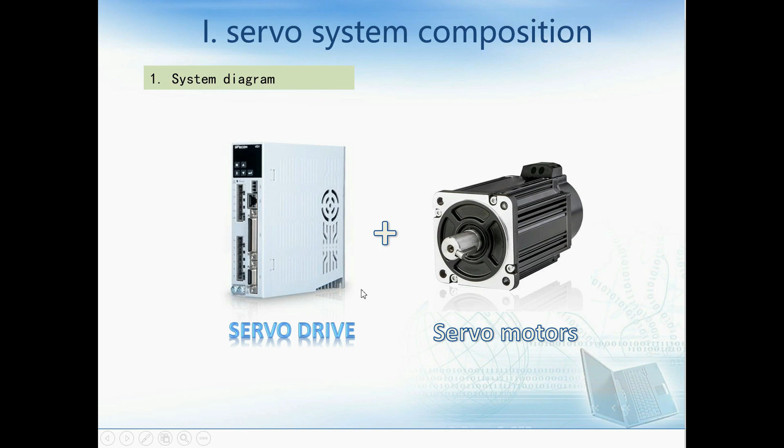Wecon Servo drive is composed of 2 parts, namely the servo drive and the servo motors. Here we talk some history about servo. The word servo derived from the ancient Greek word for slave. It means that the servo can move at a specified speed or distance.

Before the signal arrives, the rotor is stationary. The rotor rotates as soon as the signal arrives, and when the signal disappears, the rotor can stop on its own in time. Because of its servo performance, hence the name. At present, servo has become high precision, high response speed, high performance synergy.

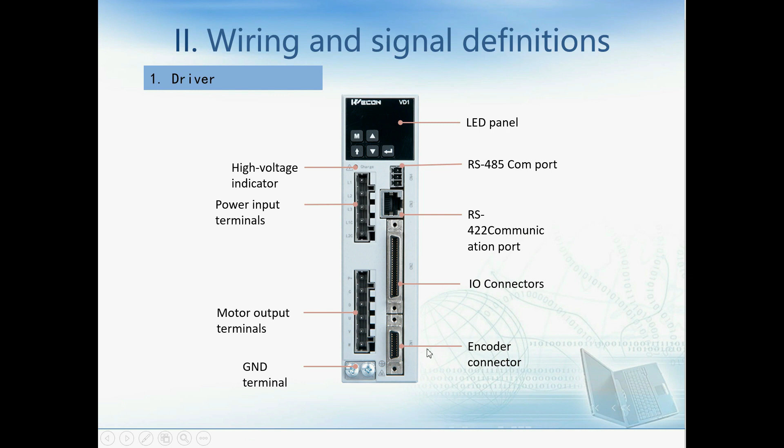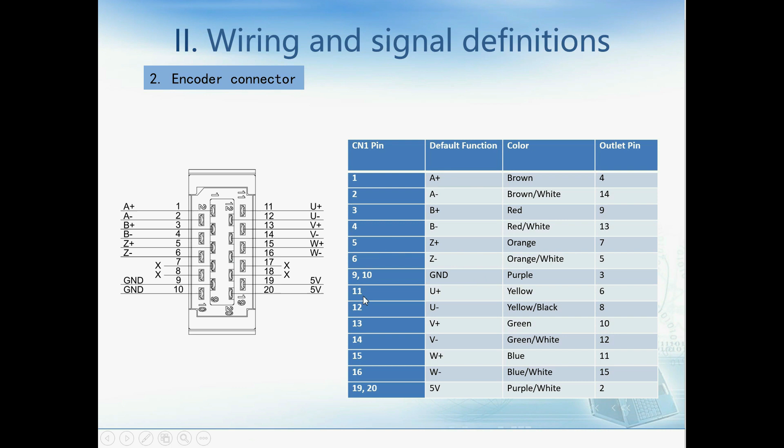And this is the I/O connector, and this one is the encoder connector. Here's the encoder connector. Because it's a ready-made cable, we don't need to solder the pins by ourselves. And this is the I/O connector. Here we can see AI1 and AI2. AI1 and AI2 are for the speed reference and torque reference. Both signals range from -10 volts to 10 volts.

And then here is the digital output port. This is the sign and the pulse signal port. Generally, these 2 signals come from the PLC, so we can use the PLC to control the direction and the speed of the servo motor. And here's the digital input.

And this is the PAO, PBO, PCO. This is the so-called pulse division output. For example, when we input the signal to the servo drive, we can get the feedback pulse from PAO, PBO, and PCO. So that's the function of the PAO, PBO, and PCO.

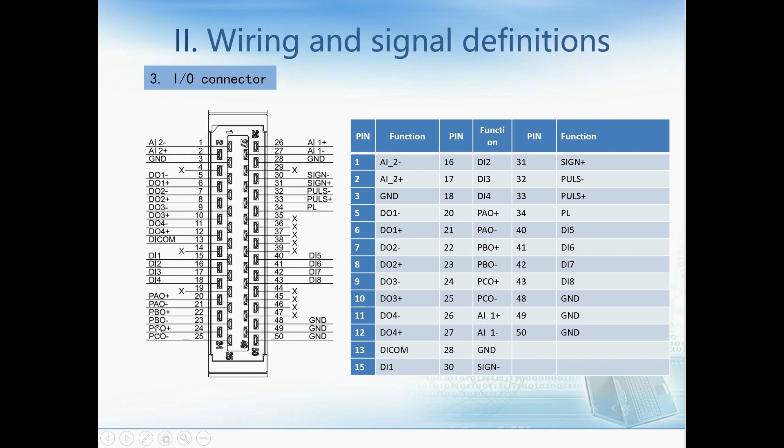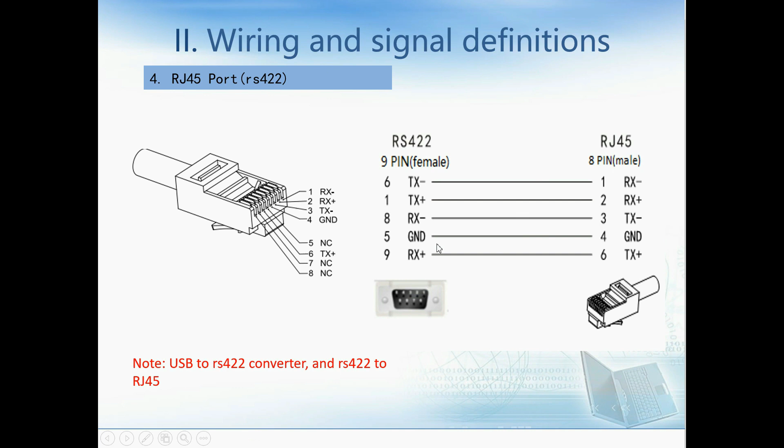And this is the RJ45 port. As I just told you, it's RS422. Because most PCs don't have a COM port, we need a USB to RS422 converter, and then we need to connect according to this diagram, and then we can debug the servo drive with our PC. This is the RS485 COM port for Modbus RTU protocol.

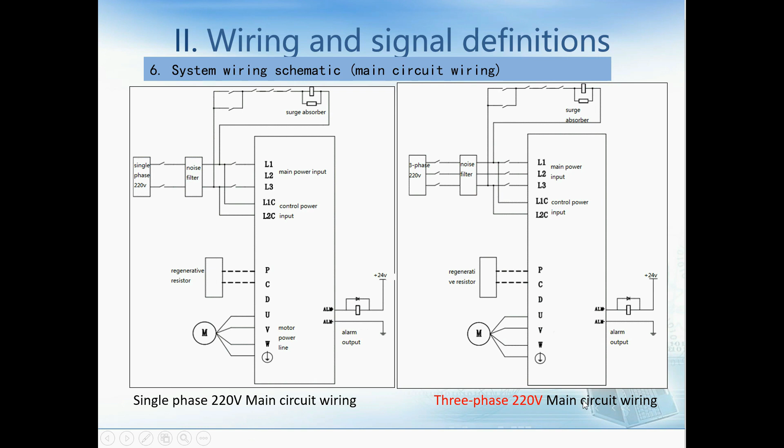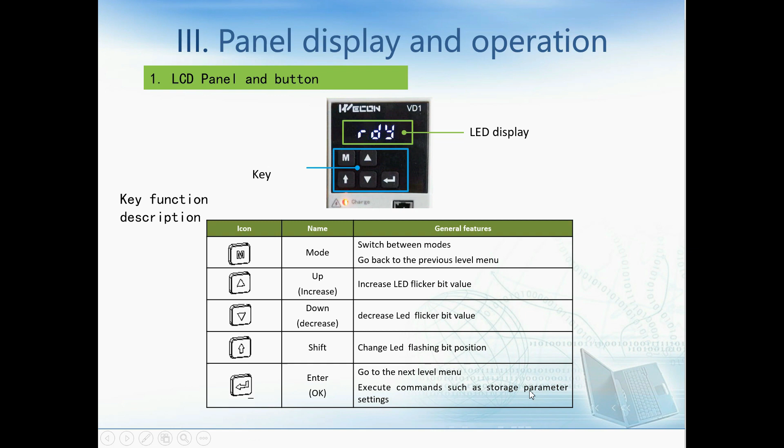from the host controller. The fourth one is run. Run means the servo drive is in running state. And the last one is jog. It means the servo drive is in jog running state.

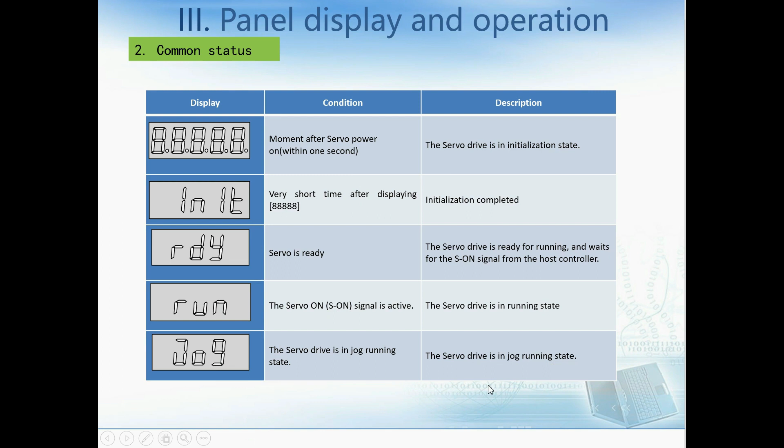And here are two alarm displays. The first one is A-84. It means we need to restart the drive to make modified parameters take effect. And error 34 means the motor is overloaded.

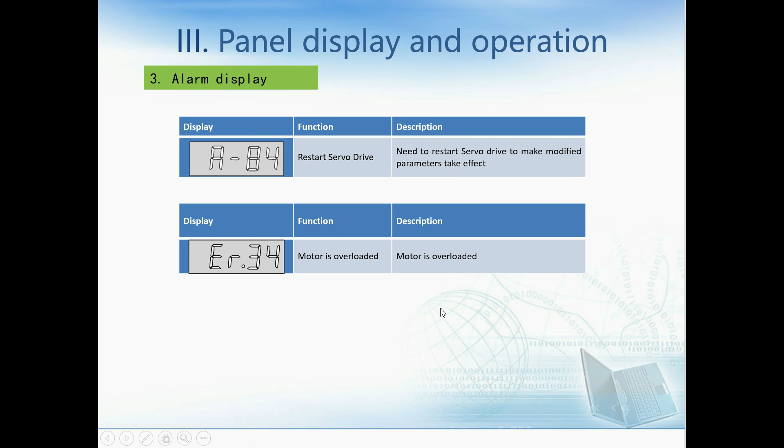And here are the 4 monitoring values. Here you can see 2000 and minus 2000. It means the actual running speed of the servo motor. Minus means the reverse direction. And this one means the bus voltage. It can display the voltage value between driver P plus and minus.

And this one represents the level status corresponding to the 8 digital input terminals. The upper part of the digit means it's at a high level, and the lower half indicator means it's at a low level. This means DI1, this is DI2, DI3, and so on.

U0-19 means output signal state. Just like the above parameter, the upper part of the digital tube indicates a high level, and the lower half indicates a low level. This one means digital output 1, this one digital output 2, and so on.

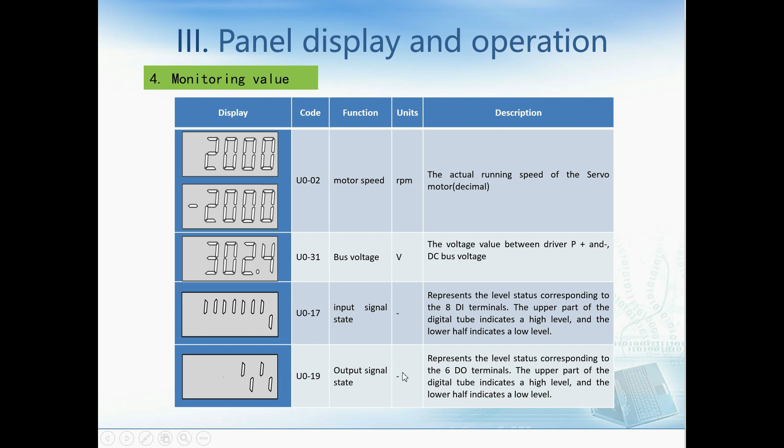Here I will show you how to control it from the front panel. First we click the M button, and then we can see P0.1. It means parameter 1. And we can use the up key to switch to parameter 2, or the down button to switch from parameter 2 to parameter 1.

If we click the enter key again, we can enter the next menu to modify the value of P1. We use the up and down buttons to change the value, and then we use the enter key to modify the parameter.

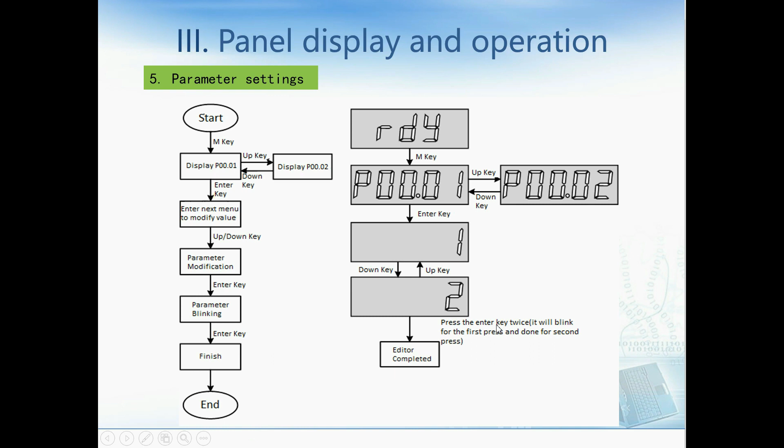Here's one thing we need to pay attention to. We press the enter key twice; it will blink the first time and show done the second time. It means we need to press the enter key 2 times, and then we can change the parameter successfully.

Here's another example. If we want to use the jog function, first we need to access the P10.1 parameter and press the enter key to display the jog initial speed. We use the up and down keys to change the jog speed, press the enter key 2 times, and then we change the parameter. Finally, we can use the up and down keys to execute the jog operation.

And here's another function we often use, so-called restore factory settings. First, we need to access the P10.2 parameter. We press enter and use the up key to change the value to 1, and then press enter again. Here we need to long press the enter key for 3 seconds. It will display DONE, meaning we have restored factory settings successfully.

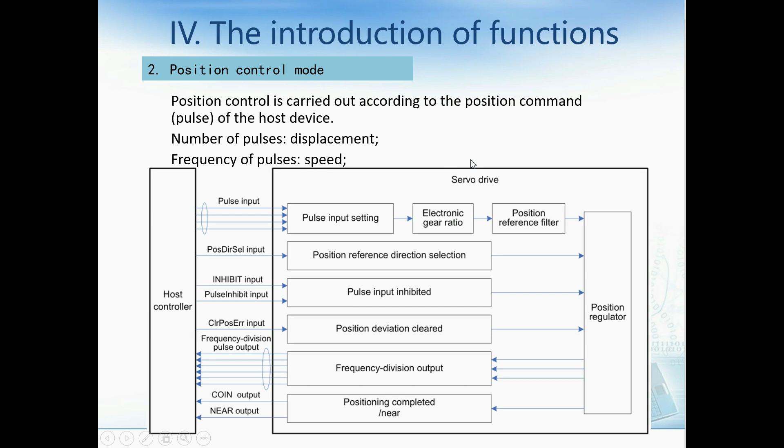There are several pulse types. The most often used is the first one, pulse plus direction. One signal for the output pulse, and another signal to control the direction.

And this is the AB phase signal. As you can see here, the AB phase signal has no separate signal for controlling direction, because AB phase can define the direction according to the phase difference between phase A and phase B. When phase A leads phase B by 90 degrees, it means the direction is positive. Otherwise, the direction is negative.

And the third one is the clockwise and the counterclockwise. This one is not used so often. It means that when the CCW signal is valid, the rotation direction is the reverse, and if the signal of CCW is invalid, it means the rotation direction is the forward direction.

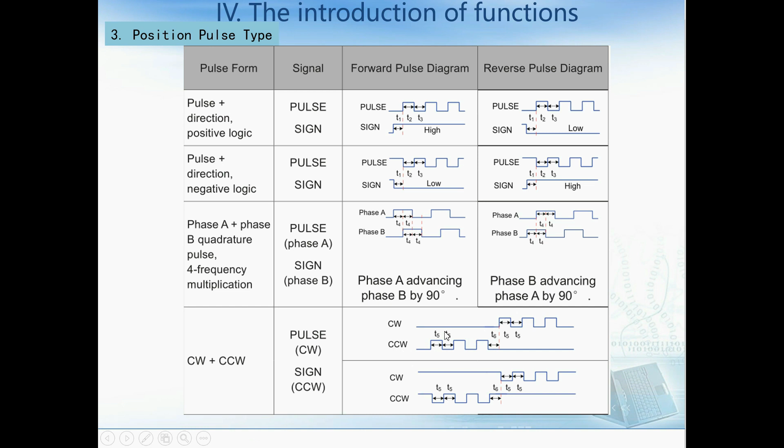This picture shows the differential input wiring for the position control mode. Because it's differential input, you can see two wires for one signal: pulse plus and pulse minus for one signal, and sign plus and sign minus for the other signal. Even though there are four wires, there are actually two signals: one signal for pulse and one signal for direction. By using the differential input wiring, it can increase the anti-noise capability, so the wire can be longer and it will be more stable.

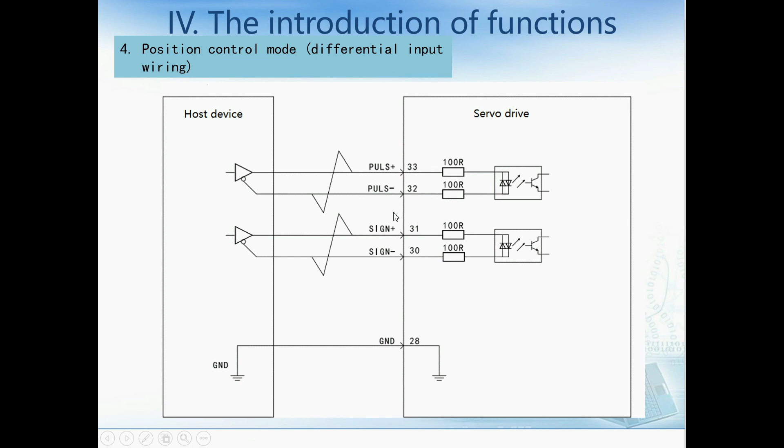And another kind of wiring is the open collector input. Because there's no 24-volt power supply in the servo drive, we need to use an external power supply. For example, if the host device is a PLC, we can use the 24-volt power supply in the PLC, and we can consider this wire as Y0 and this wire as Y1. So Y0 controls the direction, and Y1 outputs the pulse to control speed.

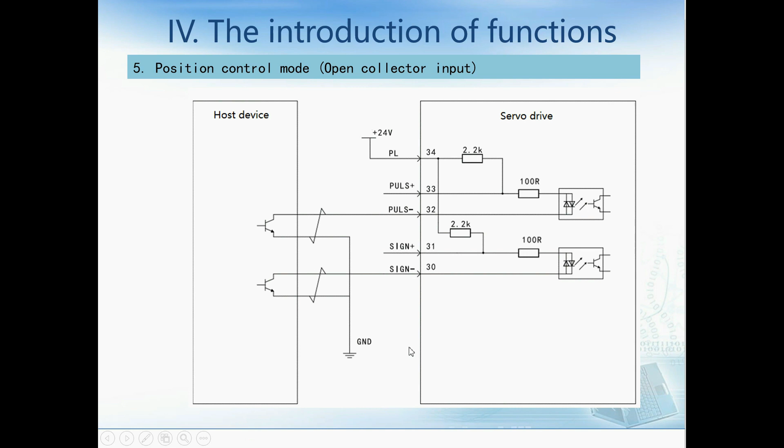Now we talk about filtering. Position command filtering is to filter the position command processed by the electronic gear ratio, including first-order low-pass filtering and average filtering. Consider adding position command filtering in the following three situations. First, the position command output from the host device is not processed for acceleration and deceleration. Second, the pulse command frequency is low. Third, the electronic gear ratio is 10 or larger.

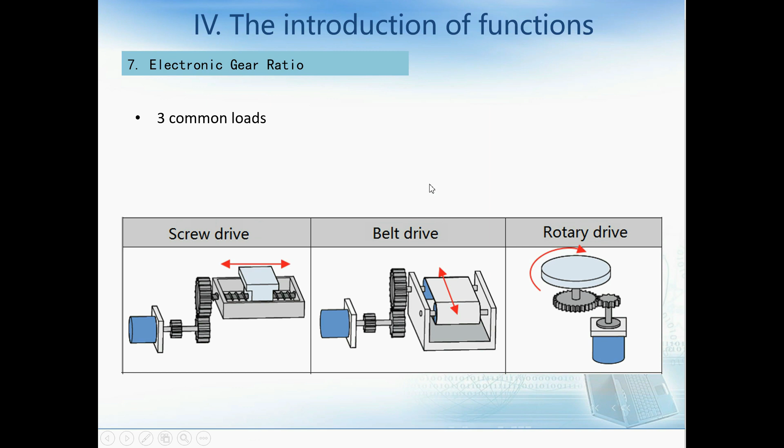And now talk about the position mode digital output. First, the position output signal is the position deviation. It's equal to the position instruction minus position feedback. The second digital output signal is positioning complete. When the position deviation is less than the positioning completed function code setting, the positioning is regarded as completed. At this time, it will output the positioning complete signal to the host device. The third one is position close. When the position deviation is less than the positioning close threshold, it will output a position close signal.

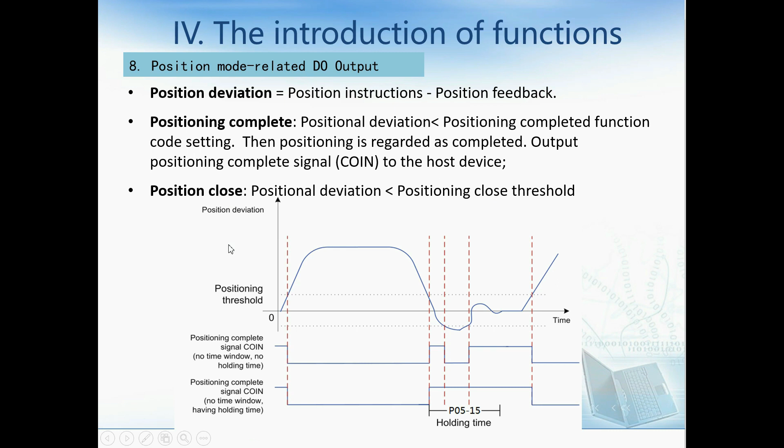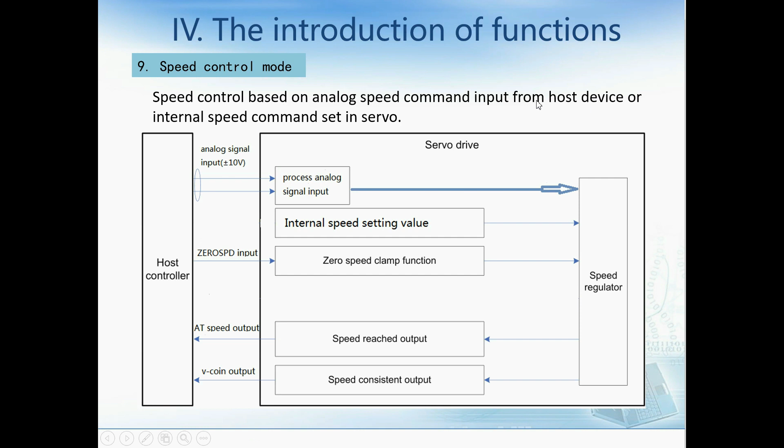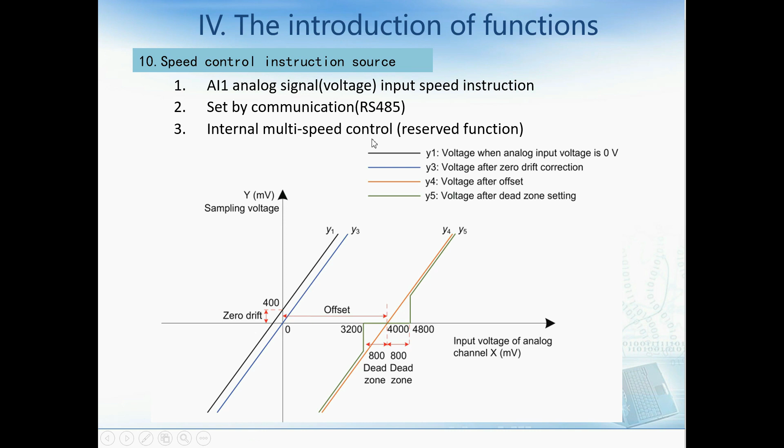Now talk about the speed control mode. Speed control is based on the analog speed command input from the host device or the internal speed command set in the servo. And there are three sources for the speed control. The first is the analog input, and the second is communication. We can set the value by RS485. And the third is the internal multi-speed control. This function is now reserved.

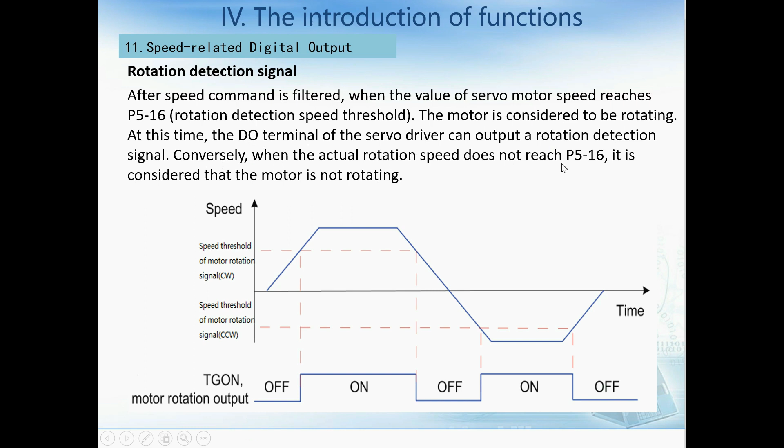Now we talk about speed-related digital output. After the speed command is filtered, when the value of the servo motor speed reaches the rotation detection speed threshold, the motor is considered to be rotating. At this time, the digital output terminal of the servo drive can output the rotation detection signal. Conversely, when the actual rotation speed doesn't reach the setting value, it's considered that the motor is not rotating.

Now we talk about the zero speed signal. When the actual speed of the servo motor is less than a certain threshold, it's considered that the servo motor stops rotating. At this time, the digital output terminal of the servo driver outputs the zero speed signal. Conversely, if the actual speed of the servo motor is not less than this value, it is considered that the motor is not at rest, and the zero speed signal is invalid.

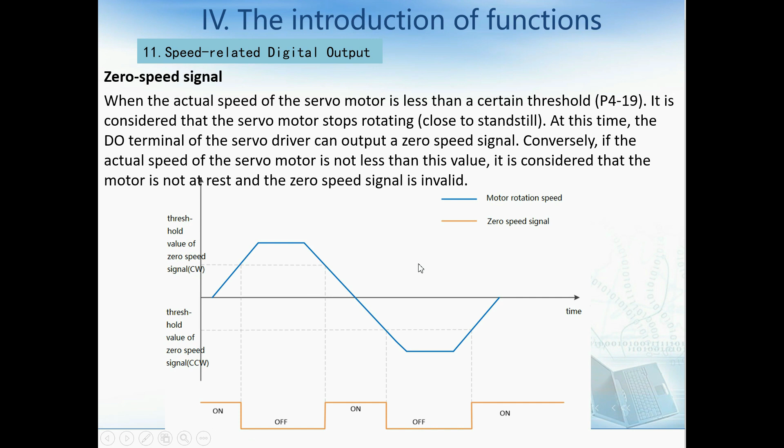And in this chapter, we talk about the speed consistent signal. When the absolute value of the deviation between the actual speed and the speed command meets a certain threshold, it's considered that the actual speed of the motor has reached the set value. At this time, the digital output terminal of the servo driver can output a speed consistent signal. Conversely, if the absolute value of the deviation exceeds the threshold, the speed consistent signal is invalid.

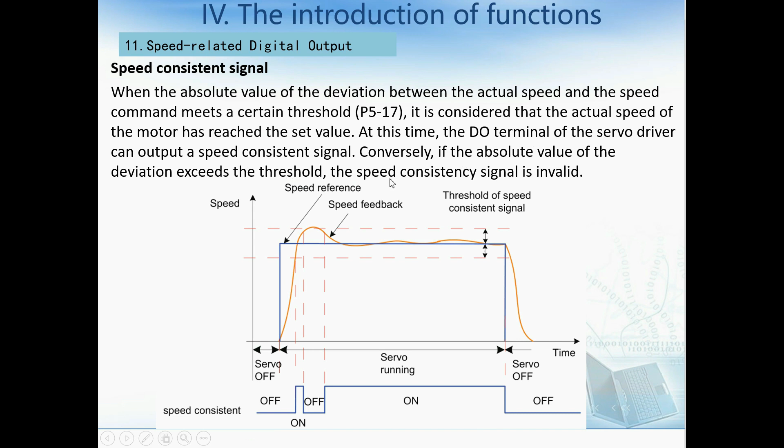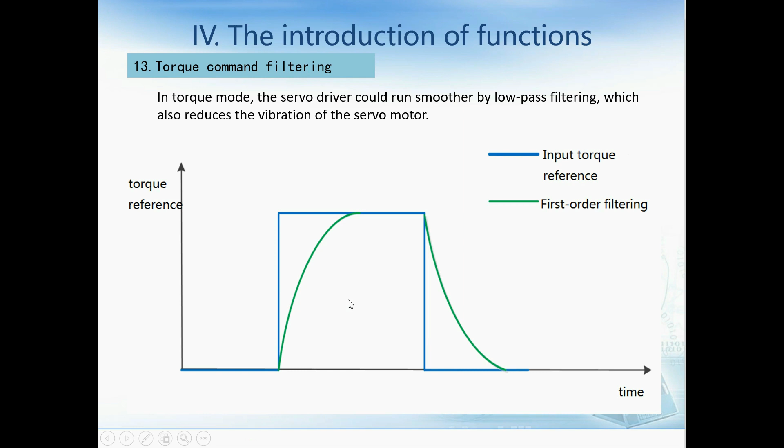Now we talk about torque control mode. Torque reference sources include internal torque setting. Another source is the analog input, set by function code P1-7. And the torque command also has a filtering setting. In torque mode, the servo drive can run smoother by low-pass filtering, which also reduces vibration of the servo motor. In this picture, we can see that the first-order filtering makes the curve smoother.

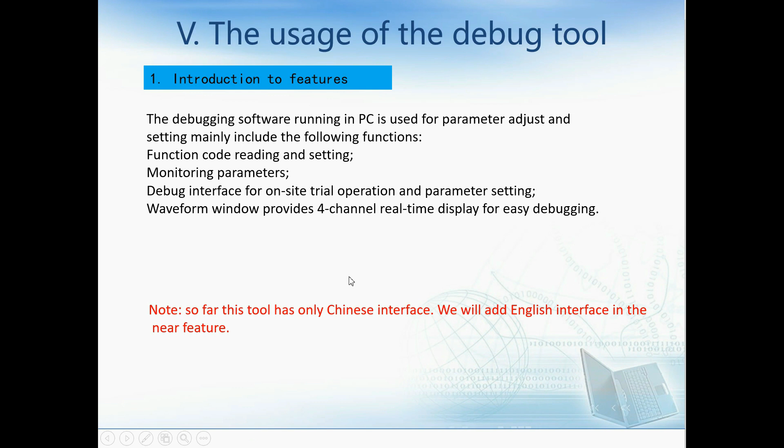The debugging software running on a PC is used for parameter adjustment, and the settings may include the following functions: function code reading and settings, monitoring parameters, a debugging interface for on-site trial operation, and parameter settings. Waveform windows provide 4-channel real-time display for easy debugging. So far, this tool has only a Chinese interface. We will add an English interface in the near future.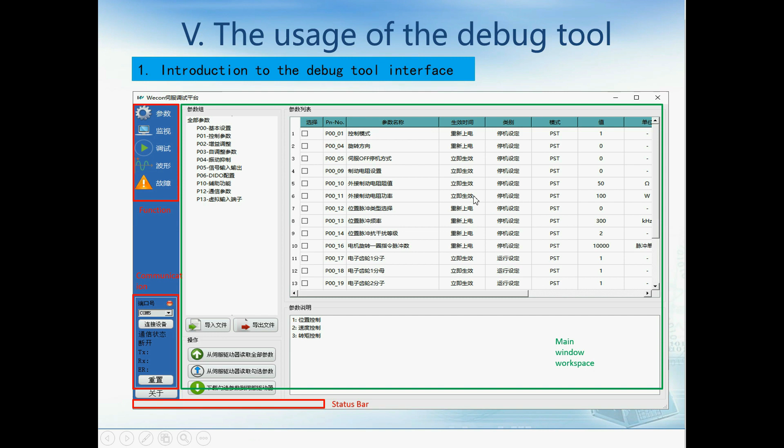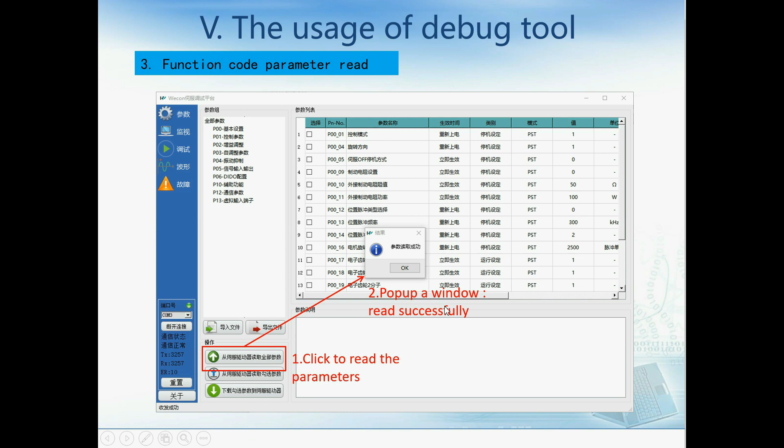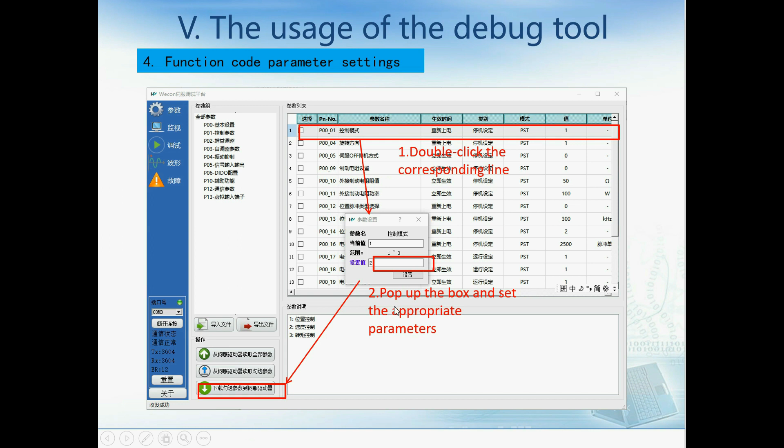Here we need to select the COM port first, and then click the connect device button. Then we click this read parameter button. It will pop up a window: read successfully. Then we can see the values in the list. If we double click the item, we can change the value. After changing the parameter, we can click this button to download the parameter to the servo drive.

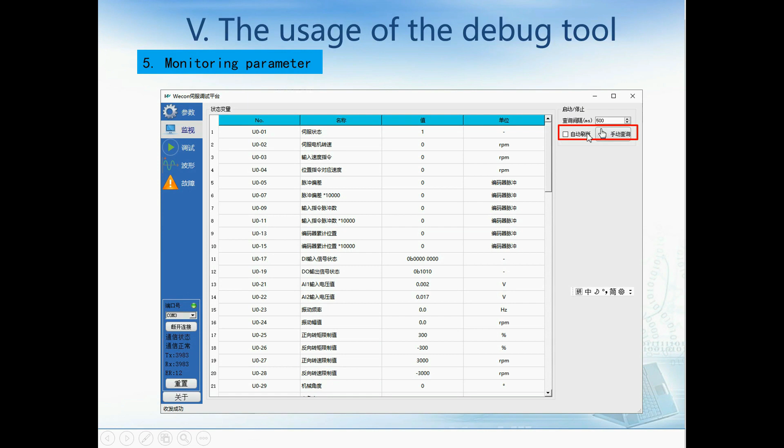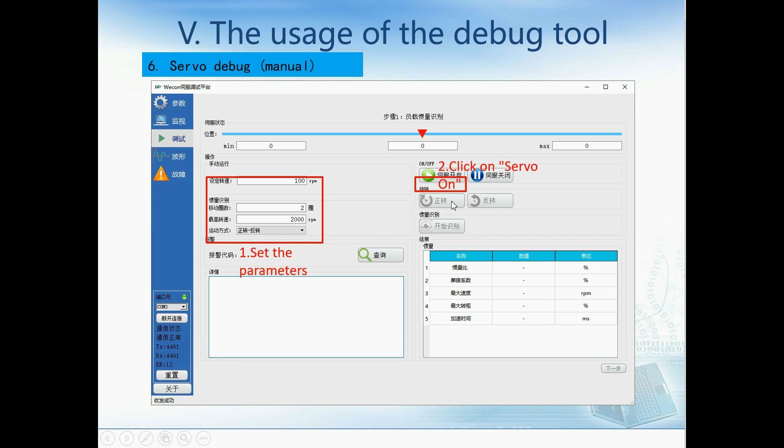In the monitoring interface, we can set the refresh interval. For example, we set it as 500 milliseconds. We can also execute manual operation. We can set the RPM here, the maximum RPM, the revolutions we want to move, and the direction. Then we click the servo on button, and the motor can start to move.

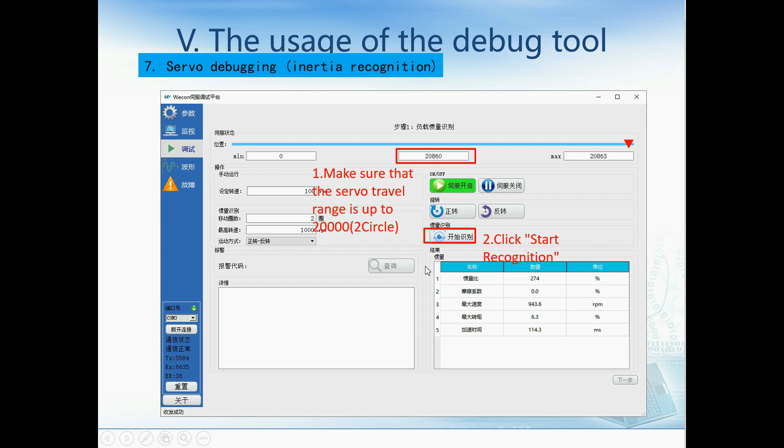Here's another function, we call it inertia recognition. First, we need to make sure the servo travel range is up to 20,000, namely 2 circles. Then we click the start recognition button. When the recognition is completed, click yes to write the arguments to the EEPROM. Here we can see the inertia ratio.

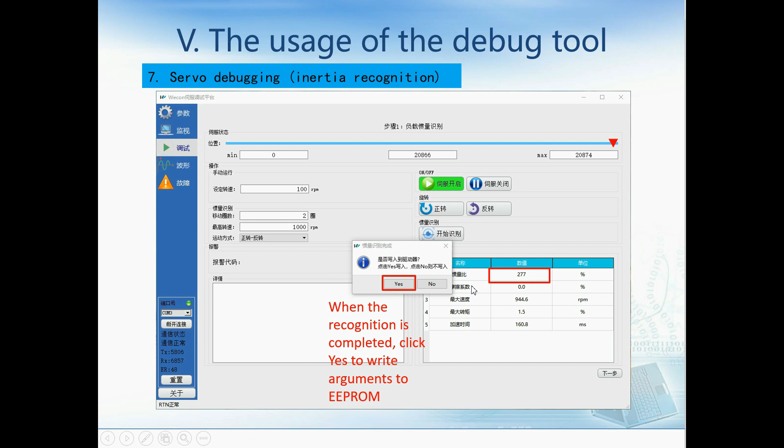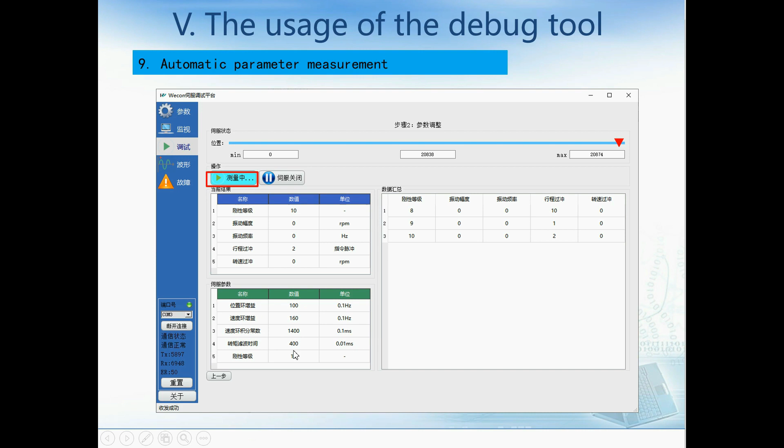Next, we can measure the parameters of the servo, like the position loop gain, speed loop gain, rigidity, and so on. Here we can see all the measured parameters, and we can click save to save the rigidity parameter.

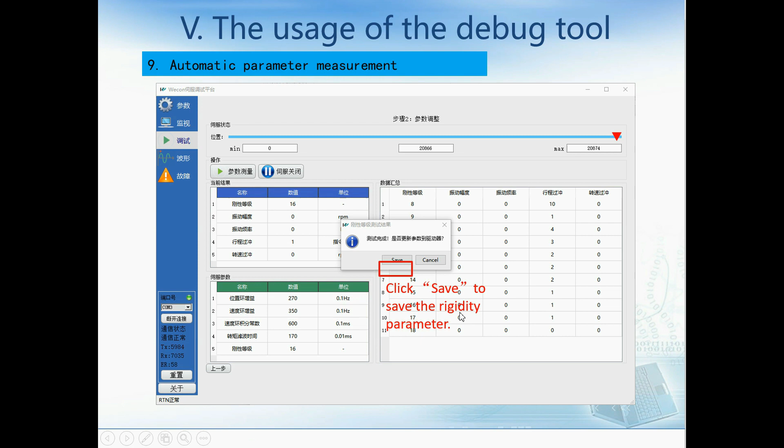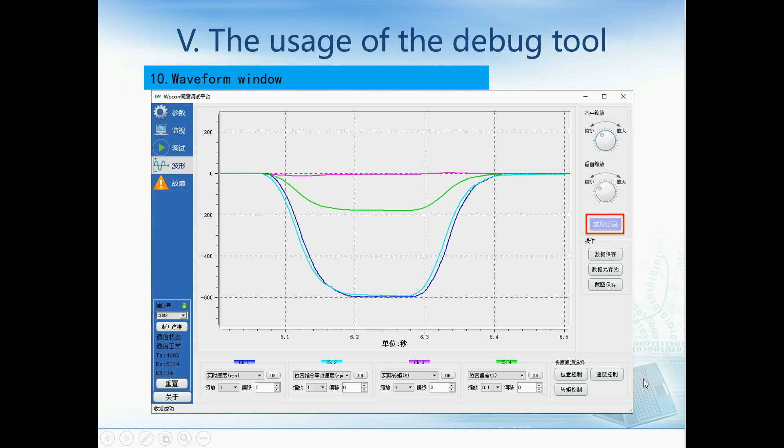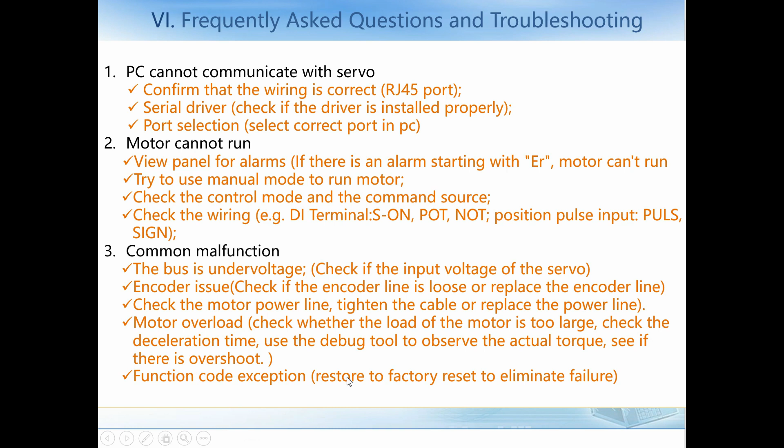For motor overload, in this case we need to check whether the load of the motor is too large. Check the deceleration time. Use the debug tool to observe the actual torque and see if there's overshoot. For function code exception, in this case, we can restore the factory reset to eliminate the failure.

And here are another 4 points. The protection rating of the servo motor is IP65; the servo drive is not. The function of the virtual input terminal: for example, when virtual digital input 1 is enabled in the servo, it is equal to giving a valid signal to the physical input terminal DI1. The default function of DI1 is servo on. Then we can make it work without connecting a physical wire to DI1.

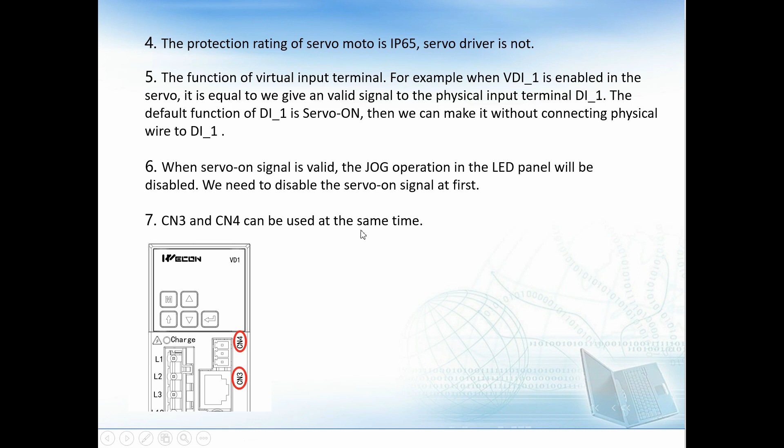The sixth point: when the servo on signal is valid, the jog operation in the LED panel will be disabled. We need to disable the servo on signal first. And the last point, CN3 and CN4 can be used at the same time. That's no problem. So thank you for watching this video.